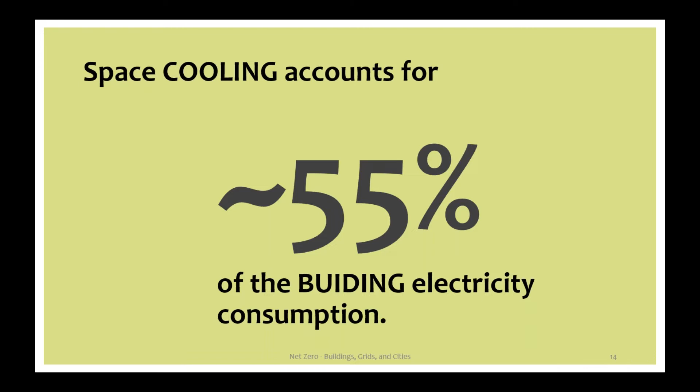So to tackle the building challenge, the building energy demand, buildings are being designed to move towards net zero. Net zero energy buildings are highly energy efficient, extremely low in energy demand, which is met by renewable energy sources. With net zero energy buildings, it obviously comes with the caveat of integrating renewable energy. In highly dense vertical cities, buildings often face constraints to meet this RE requirement.

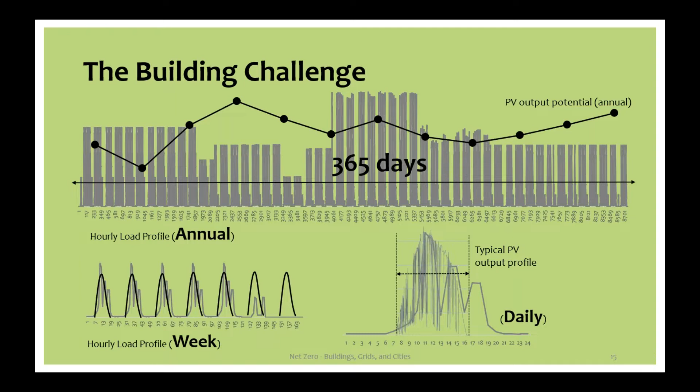Also, net zero energy buildings push back electricity to the grid whenever they have it in surplus. It's a very inward looking approach, and this doesn't necessarily align with the utility challenge. When we shift scales from the building level to a utility level, the challenge is entirely different. In addition to the seasonal peak demands utilities were already facing, they are now facing multiple peak demands within the day, which is not addressed by net zero energy buildings standalone.

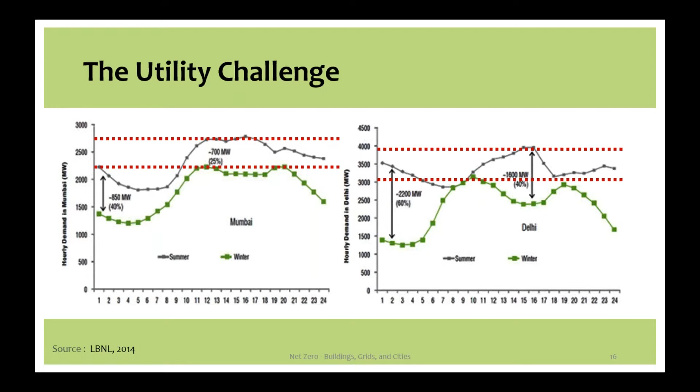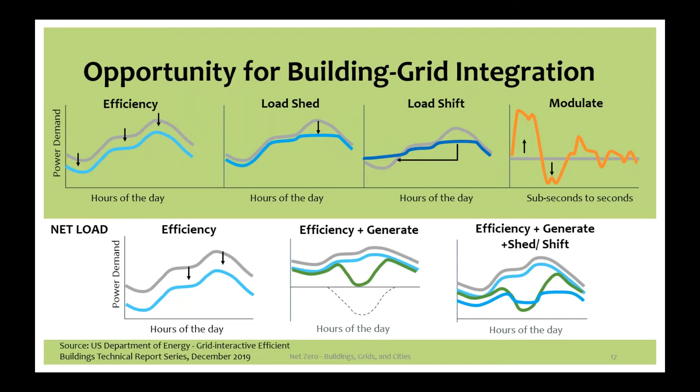Utilities are also facing variable loads, such as increasing renewable energy, with battery storage and EVs coming into play. Therein lies an opportunity for building grid integration, where buildings start playing a role in solving the challenges of the utility and city energy demands by being first and foremost energy efficient, next flexible, connected, and smart. They are able to shed, shift, and modulate loads based on the requirements of the larger network. They can also generate and store power and offer relief to the utilities, ensuring reliable power.

When we shift scales from buildings to utilities to cities, the lens to view challenges and opportunities also changes. Conversations are now moving towards buildings as an integral part of the grid and the city at large. There is an opportunity to move towards equity and sharing of resources, like the policy for virtual solar rooftop, which enables buildings to cater to the needs of their neighborhoods.

With countries making net zero pledges, working towards reducing carbon emissions of the building stock, transitioning the grid towards digitization, decentralization, and decarbonization, the onus in the end falls on our cities to meet these commitments. Net zero cities can pave the way. There are many examples of different cities making efforts towards integrating solutions that benefit buildings, utilities, and its citizens. I'll take one.

Energy efficiency is often spoken in the context of buildings. The Cooling Singapore initiative outlined 80 measures such as vegetation, public mobility, materials and surfaces, energy consumption patterns, urban forms, water, and shading. At a city level, these strategies are in the end strategies of energy efficiency at scale. These not only reduce building cooling requirements, mitigate heat island effect, but also improve outdoor thermal comfort.

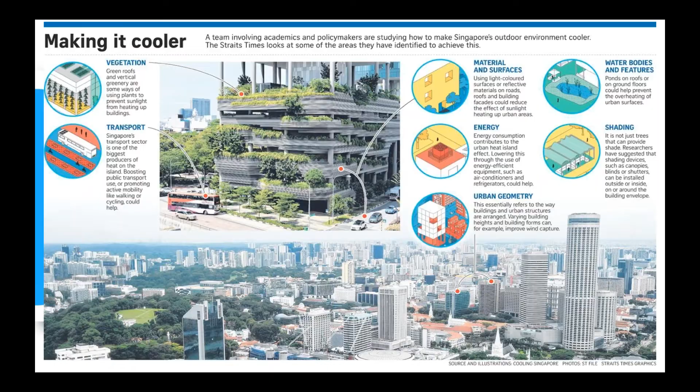The Cool Roofs for Cool Delhi is another example. Implemented at scale, cool roofs reduce building energy demand, reduce loads on utilities, and better the environment for the city as a whole.

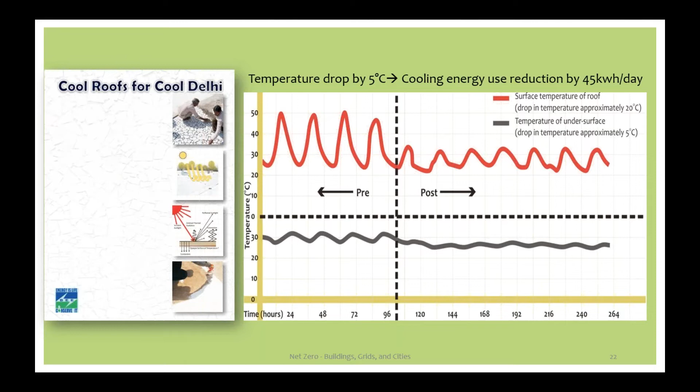Globally and in India, there are various programs, policies, pilots, action plans that are moving cities towards net zero, be it India's Smart City mission, the Solar City initiatives, cities of India participating in the Race to Zero campaign, USDOE's Connected Communities, C40's City Network, and green rating systems.

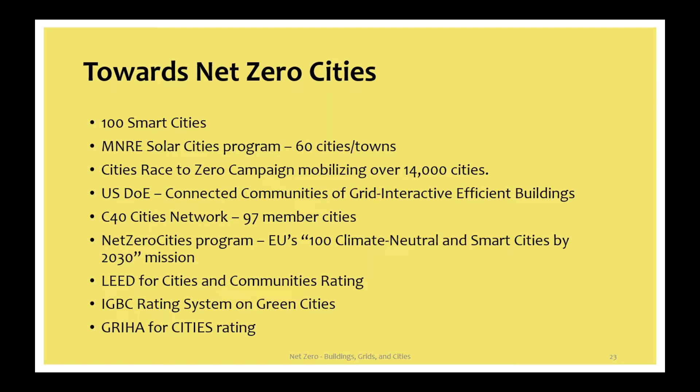I'd like to end back at where we started. Our towns are continuing to grow into cities as we speak. Integrated policies, metrics, pilots, schemes, roadmaps, action plans are need of the hour for building a green cities ecosystem.

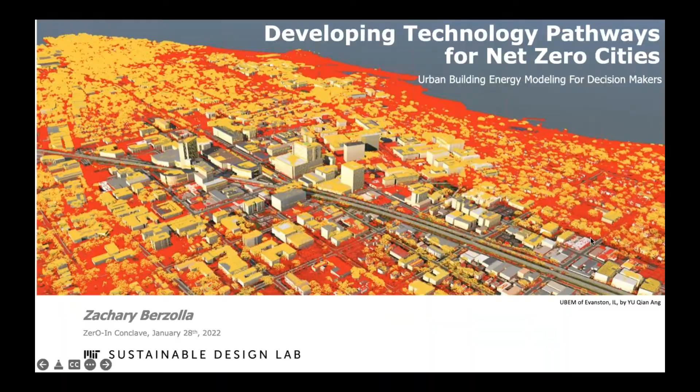Hello. Thank you very much. My name is Zach Berzolla. I'm coming from MIT. My talk today is titled "Developing Technology Pathways for Net Zero Cities," and the whole goal here is to use urban building energy modeling to help work on these goals. The lab is a diverse mix of students, and we study a whole bunch of different topics all around buildings. We have actually been working on several different projects around reducing cooling demand in India as well. I won't talk about that, but I just wanted to put that as a context.

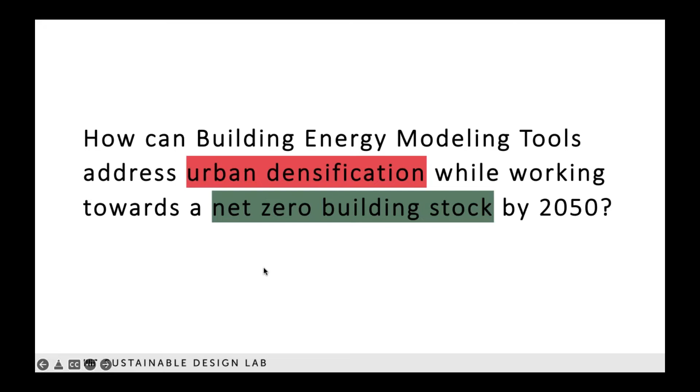The main question here is, how can building energy modeling tools address urban densification while working towards a net zero building stock by 2050, which is one of these goals that we're trying to meet if we're going to meet our Paris Agreement emissions reduction goals. I really like this slide. Nidhi did a great job setting us up, as well as why we need to be working on this.

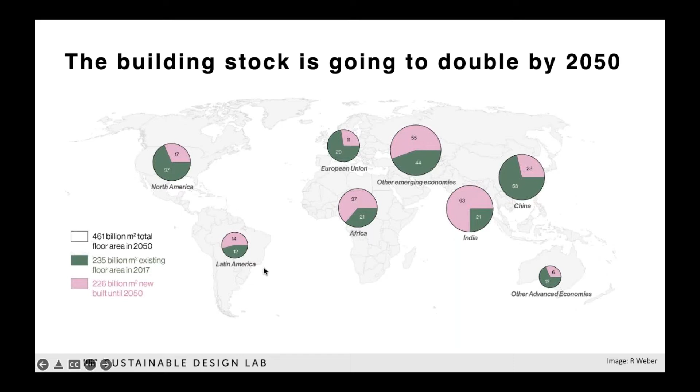Around the globe, there are differing challenges in the built environment. In North America and Europe, it's a renovation challenge. Most of the existing buildings today will still exist in 2050. In India, Africa and other emerging economies, there's a huge need for building new net zero buildings, because the building stock is going to double in the next 30 years. But there's still a renovation challenge as well. Our goal is to provide actionable and reliable information for cities to transform the building stocks.

UBEMs are the tool of choice for this work, at least in my opinion, and in our opinion in the lab. But just to give you a little bit of background, what is an urban building energy model, a UBEM? First, we need to start at building energy modeling. For 30 years now, we've been figuring out how to get to net zero. And at this point, in most climates around the world, we have it figured out.

Through some combination of insulation if you're in a cold climate, better equipment if you're in a hot climate, even a little bit of insulation in a hot climate, and then things like heat pumps and weather stripping, and then photovoltaics or other renewable sources, you can get an individual building to net zero pretty quickly, pretty efficiently, and cost effectively. However, how do we scale this? That's really where urban building energy modeling comes in.

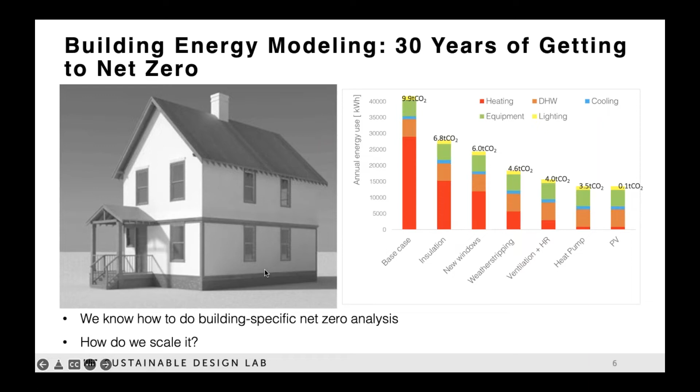So to give you a bit of a sense, what are the key pieces? Well, when we build an individual building energy model, we need weather data, we need geometry data about the building, what does it look like, and we need some other information that talks about how the building is built.

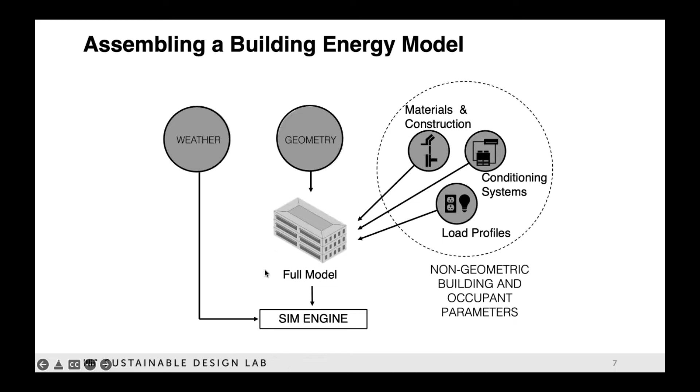What are the walls made up of? What are the windows like? What are the people? How many people are in that building? And we can use these same things to build an urban building energy model.

And so this is one of the first models we built about 6 years ago now in Boston, Massachusetts, in the US. And it was a huge model with tens of thousands of buildings, and it allowed us to get these energy consumption data across the entire city without having to build models hand by hand for each individual building. And this was a big breakthrough, and really lets us go and start to answer these questions around the world at scale.

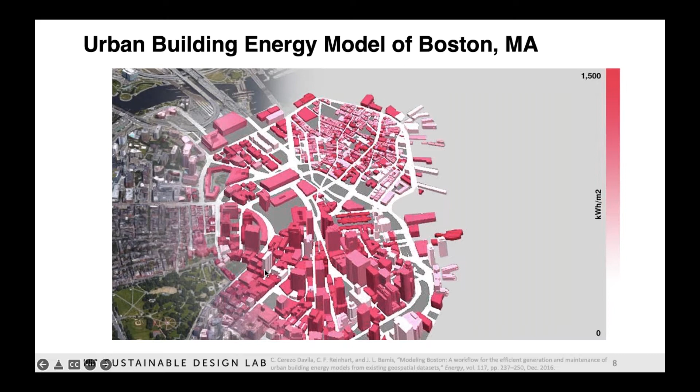And so just to give you, again, a sense, what does it take to build this model? It's very similar to that individual building model, but you now need to describe it across a couple of different types of buildings in the city. And so we assign types. So think about, schools might be one. You might have an office building, a residential home, a retail store. Now instead of describing a single building, we describe buildings of that type.

And we use that typology and define all this other information we used in an individual building model and define it for that typology, and then can expand that and run the simulations across the entire area. And that's what gives us an urban building energy model.

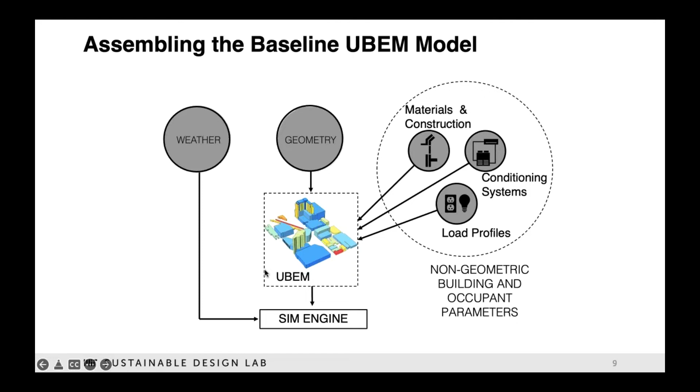And so I want to walk you through a little bit how you get these key pieces of data because it's been a huge challenge. And in that original Boston study, it took a lot of time and effort to actually get all those people together. And if we want to scale this technology and be able to build models everywhere, we need everyone on board. And so these are the three key roles that we've identified that are necessary for building a model and getting it forward and making that fast.

And so it requires a city representative, the sustainability champion, the person who's going to say, we have some emissions reduction goals, we're trying to get to net zero, and we're going to have this project to make it happen. Then you need somebody that understands the data about all the buildings, and they are able to work on the geometries of the buildings.

And then beyond that, you need someone with energy modeling experience, and they're going to be the ones that figure out what's in that wall, how good is that window, what is the cooling system being used. They're the one that understands the technology side of it. But they only need to understand how to do this at the individual building energy modeling level, and the tools we've built help you expand that very easily to the whole city.

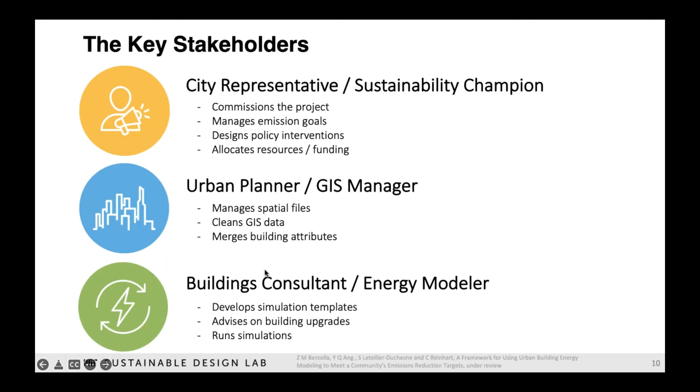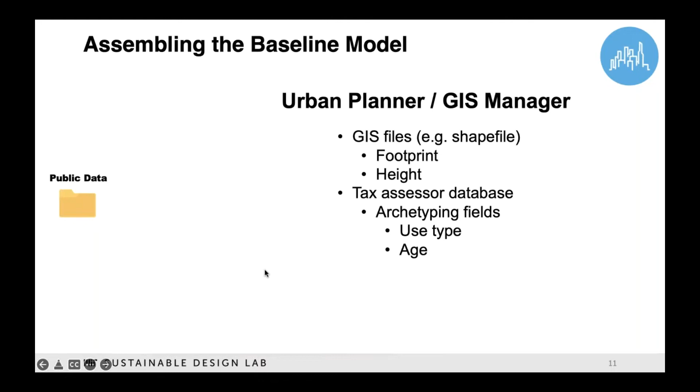And so that person with the understanding of the data needs to get some footprint data for the area. And then they also need something about those use types. Is it a school? And when was it built? Because that often helps define the construction. And so now we have the geometry data, which is great.

Now we need to go and pull together all that information about how the building was built. And that energy modeler needs to identify all those different types that they want to look at. And they want to group them all together and understand what everything's going to be doing. And what we've done to help enable this whole process is built a tool called ubem.io. It's a website specifically designed to bring these three people together and help them bring this information in and build a model using these GIS shape files as the base print.

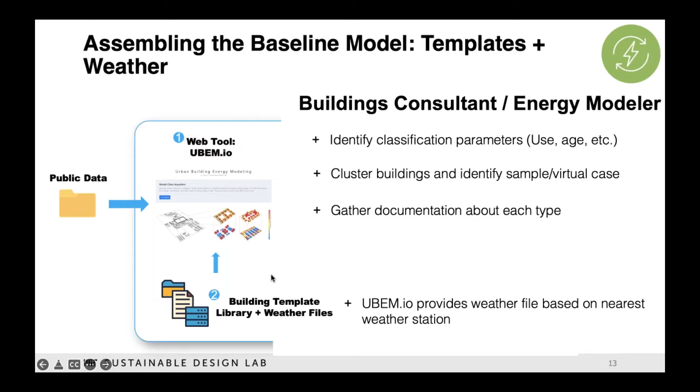And so the energy modeler is going to be working with the website and some of these definitions of how the building is constructed to make this happen. And we're providing weather data on that website based on this international collection of weather data.

So the next step is we need a simulation engine. We need something to actually run these models. And so that's where we've built this tool called UMI. It runs these simulations. And one of the things we're really happy and excited about is it runs it very fast for a whole city.

I ran a model in a case study that I'll show you shortly of 13,000 buildings in about 5 hours, which is a huge improvement over an individual building model that might take a minute to run just itself. So you can imagine what that might take. It could take hundreds of hours to run it across 10,000 buildings.

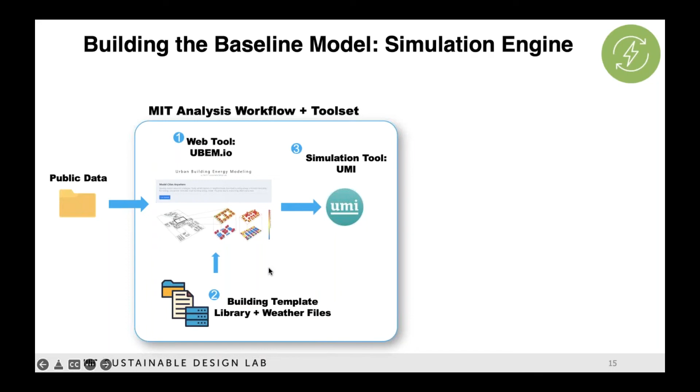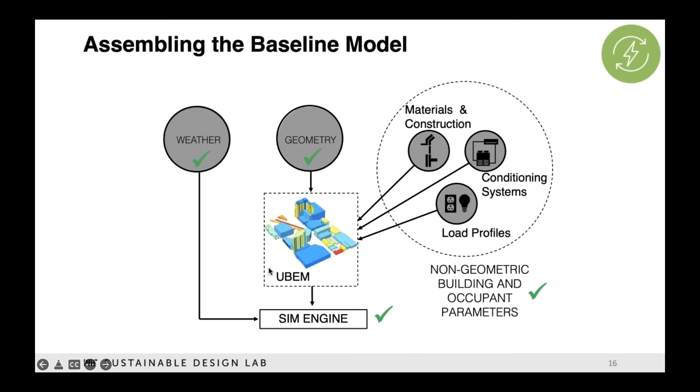There are other tools out there as well that do this. But at the core, UMI and several others are still using EnergyPlus, which is one of the standard simulation engines for individual building models. Okay, so now we have everything. We have weather, geometry, this information about how the building is constructed, and a simulation engine. We can get an urban building energy model.

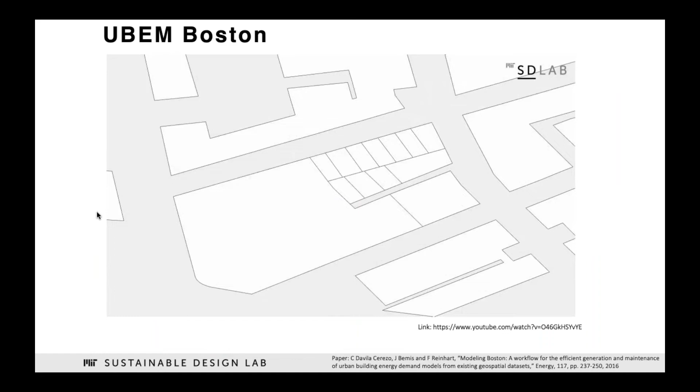And so I want to share with you this. This is a kind of animation walking you through how that Boston model was built. We started out with the information about the footprints of the buildings, and then we extruded them up based on the height data that we gathered.

And it's not going to work with me today. All right, we're going to go fast.

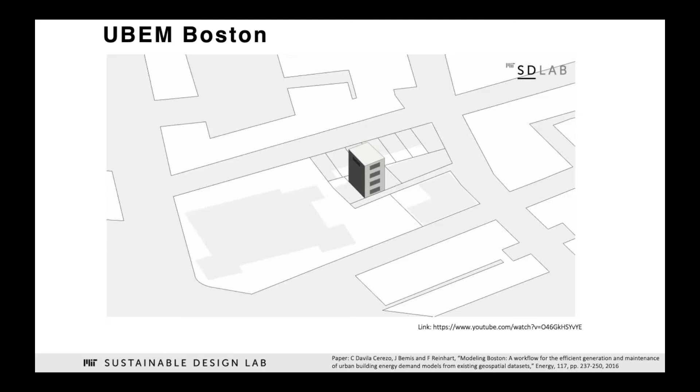The height data that we gathered, and then we're basically just breaking it down into the number of floors and putting a bunch of window area on it based on the information we gathered. And then we bring up all the other buildings around it as well using that same data source. And we can either simulate all those buildings, or, if we want to look at that single building, they can just be used to shade that building as information.

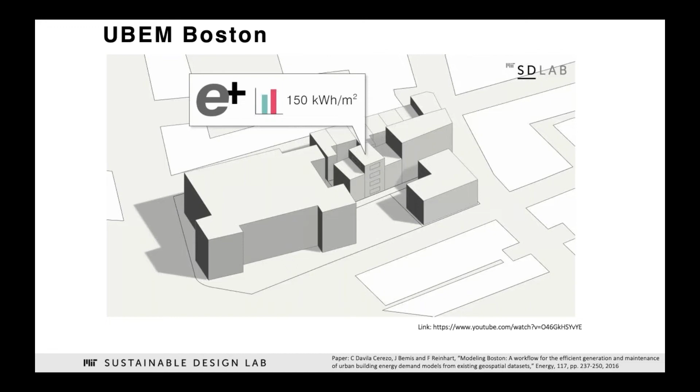And so the four key pieces here that I wanted to highlight is we've identified four use cases for urban building energy modeling. The first is urban planning and new neighborhood design. Where there's a new development going on, you can use these tools to identify the best organization of those buildings, the best way to construct those buildings, and do it at scale by defining these few types of categories and replicating it around the whole area.

And in UMI, we can look at the amount of daylight that's coming into a space. We can look at the amount of energy that's being used, and other amenities such as walkability and the life cycle carbon emissions. So that's the first use case. The second one is the one that I focused on a lot, which is the stock level carbon reduction strategies. If you're a city and you're trying to get to net zero, how do you actually get there? And I'll show you a case study of that in a moment to illustrate the point.

The third is building level recommendations. If you're trying to provide individual recommendations to a homeowner, to an owner of an office park, you need the energy data for that building to make sure you have that model spot on. If you do have that data, you can also then go into this building to grid integration that was already touched upon, where you really understand down to the building level what the load profiles are looking like. And you can do that now across the entire city very quickly because you've built up these models of all the buildings.

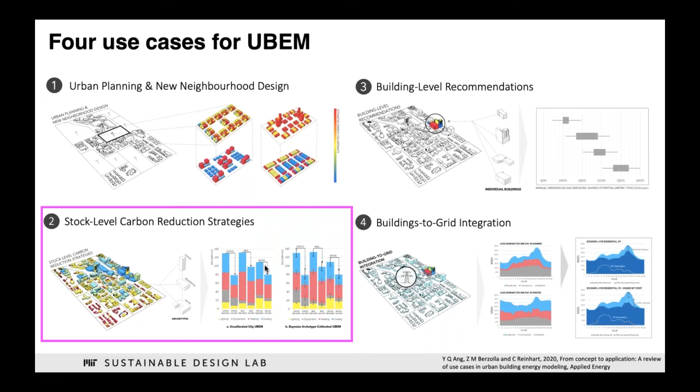And so just to give you a quick case study here, this is Oshkosh, Wisconsin in the US. All you need to know is it's a small city, 60,000 people. So it really is quite small. And I know it's very different from pretty much any city in India, but the idea here is this is scalable. This is something that they would not have had the funds to do normally, to build a normal urban building energy model. We came in and I was able to build this model, about 10,000 buildings, very quickly for basically no money. And so this was one of these case studies to prove that we can scale this tool worldwide.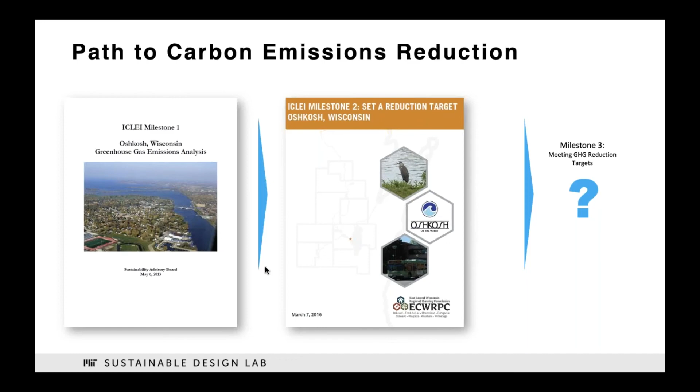And so the city of Oshkosh doesn't quite have a net zero target, but they want 85% emissions reduction by 2050 over their baseline. And they're in this place, like many other cities that understand their baseline emissions and have set some reduction target, but they don't know how to get there. And so the whole goal here was to help them get there. And to get there, I developed these technology pathways, which is what we're calling a set of building-specific upgrades that are going to reduce carbon emissions by a given amount.

To get them to their goals, they needed to add PV. So I did a simulation, and we found that 50% of their rooftop area would let them meet their 2050 85% reduction goal. That's the kind of thing we can do now in this urban model - we know the whole building, all the energy consumption across all the buildings, and all the geometry, so we can look at the solar potential across all those rooftops, run a quick simulation, and immediately know what we need.

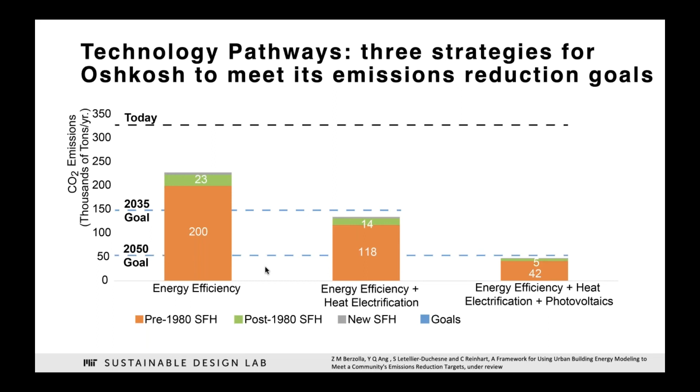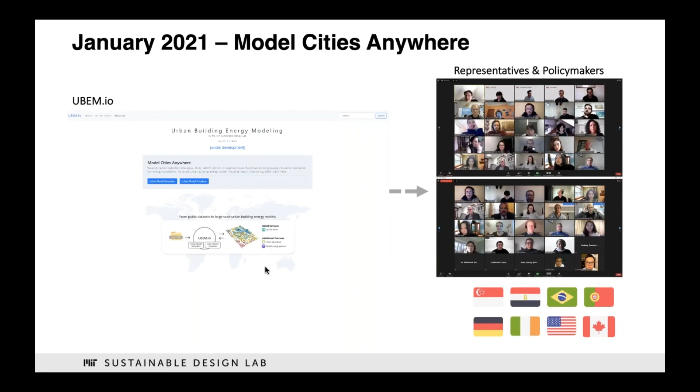Just to take one step back, to prove out this whole workflow in ubem.io, last January I ran a workshop with a few others in the lab with 8 cities around the world, all trying to address these questions. Invariably, they either had net zero goals or nearly net zero goals. So we started with these small models and districts in each of the cities as exemplars, and working with city representatives as well as some students to do the energy modeling work, we were able to run these models and start to answer some of their questions.

And then from there they were given back to the cities to scale. For example, the city of Kiel in Germany - their model is now 40,000 buildings across the whole city, taken over by a local partner. They're starting to use that to answer questions around how their district heating system can help them get to their net zero goals.

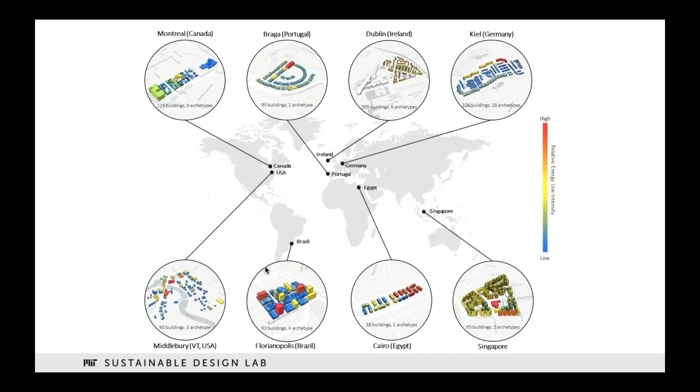The city of Florianopolis in Brazil - this was the first time the city decision makers really started to understand just how much of an impact the loads from their appliances, the heat generated from appliances inside the buildings, were affecting their cooling demands. So they realized they needed to set policies and build programs to help their homeowners and office building owners put in more efficient appliances, because that would greatly reduce their cooling demand. That, along with more efficient cooling technologies and some passive shading technologies we were simulating, would help them get to their goals.

One of the biggest takeaways from this whole effort was there's widely varying goals, interests, and climates around the world. None of that is a surprise, but it further motivated the need to run these models in lots of places. We can't say, here's a one-size-fits-all strategy - we need to try lots of different options and tailor them to the individual needs of each community. That means tailoring how the buildings are defined and tailoring what the upgrades are for different communities.

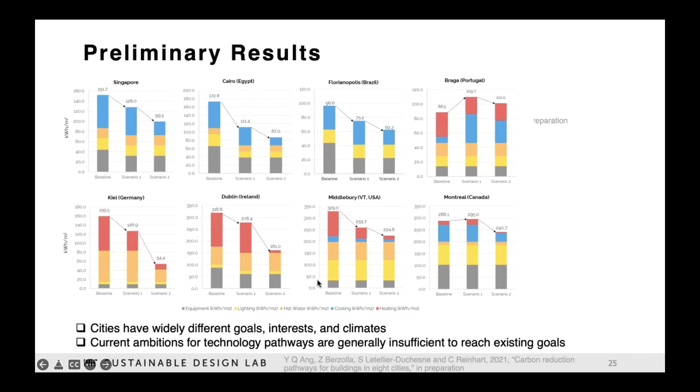My whole takeaway here is that we can leverage UBEMs to help guide net zero policy making. With these tools, you can pull together the right data to make informed decisions about how you should proceed - what technologies, what programs, what policies can help guide each city, a state, or even a whole country. If you really want to get to that level, you can use this to help guide you forward to your goals. That's one of the things we're really proud of with this work - it's open to everyone.